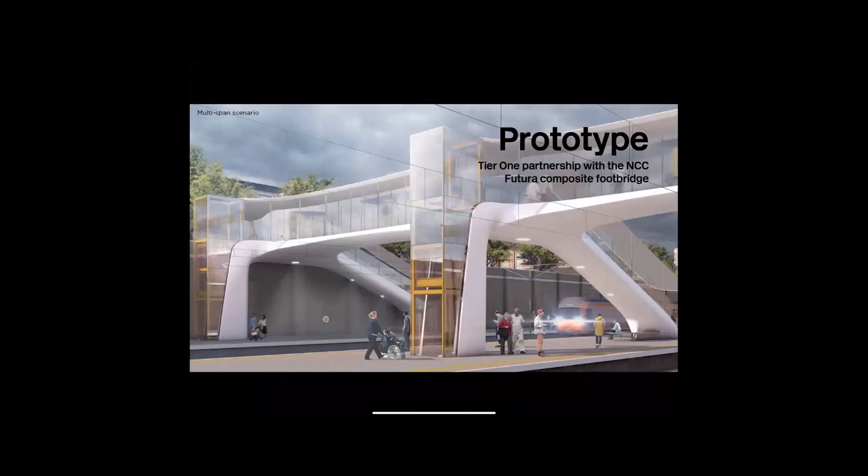This is another design that was part of the footbridge competition, but we are developing a prototype for a sort of innovative composite model footbridge. We're partnering with the National Composites Centre as a Tier 1 member. It's the first rail infrastructure company to do so, and that gives us access to world-leading expertise.

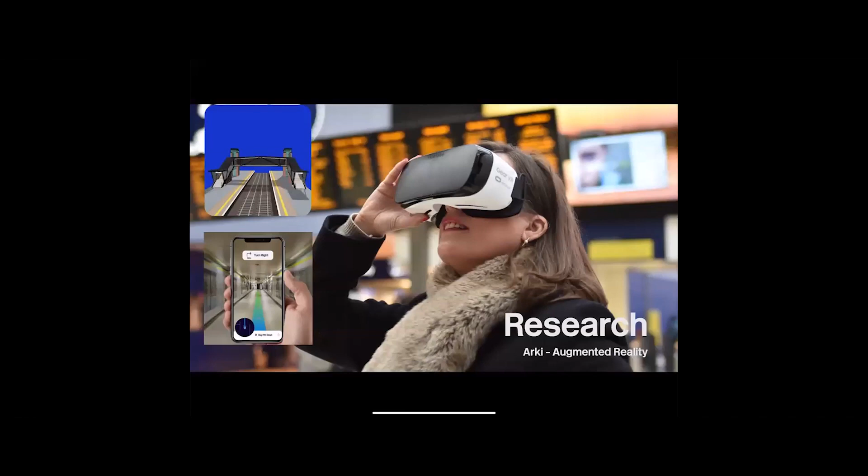Other things going on: if you've been running around the stations recently, you'll see the station bench competition that we're running with the London Festival of Architecture, which is great fun. We're looking at ways the station can react to passengers by automatically anticipating their requirements, providing useful on-hand information. We're also working with external tech companies to use AR software to help the public, planning and project teams pre-visualize footbridges and wayfinding in real time as you move through spaces.

A major advantage of external collaboration is the capacity for innovation through challenge and disruption, as I've mentioned before. So another example of this is our engaging with think tank organizations like Hack Partners, in this instance, to develop a wayfinding flow analysis tool. And this kind of joint brainstorming is about understanding what services we're trying to provide and innovating to solve these problems. You have to accept the disruption, I think, in order to move on in many ways.

And finally, I think I'm near the end here. We're also thinking strategically. I mentioned small stations. In 2018, we commissioned Arup to examine the future role that stations play in our towns and cities, and they published a report called Tomorrow's Living Stations. Last year, we followed that up by launching Think Station, which aimed to directly communicate with the hugely diverse base of stakeholders that stations serve. 11 workshops were held throughout the country that involved 324 stakeholders, train operators and all sorts of stakeholders.

And the aim was to define a brief for the station competition, which the RIBA launched with us earlier this year, and we've just shortlisted the entries, and we'll be announcing those soon.

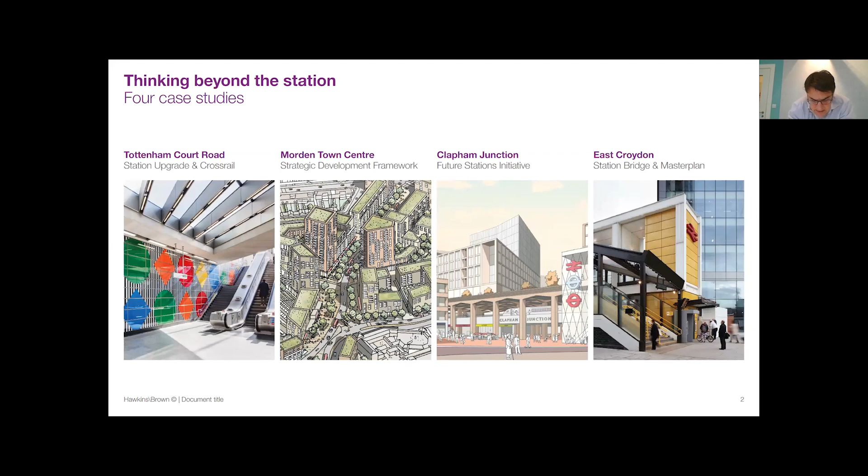The first one is going to be about Tottenham Court Road station, which is really all about developing within sensitive city centre locations, and then Morden town centre, which illustrates some of the planning for growth around transport nodes that's going on, and then Clapham Junction, which is a future stations initiative we worked on, a self-funded initiative, which is looking at a much more transformational opportunity, perhaps. And then the last one is going to be East Croydon Bridge, which demonstrates how even a small connection can act as a major catalyst for regeneration.

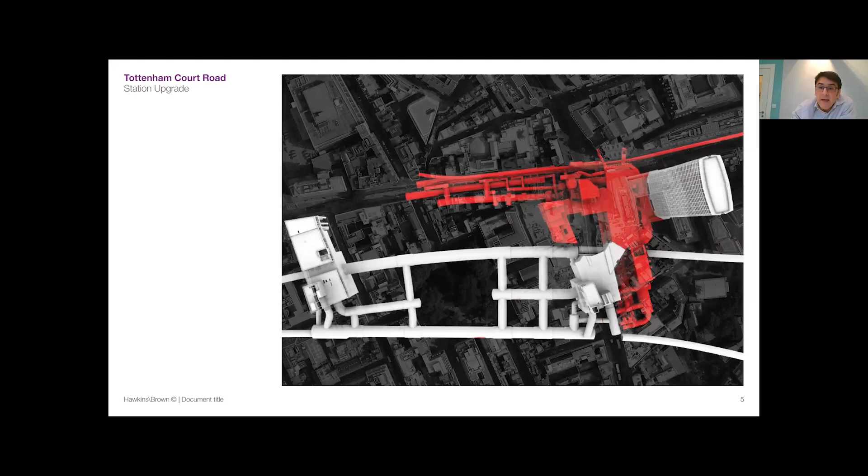For those who remember, the fountain at the bottom of Centre Point occupied quite a large part of the public space, and some of the area extended right up to the edge of the pavement. And that made orientation and wayfinding quite difficult, and created a real barrier for pedestrian crossings and connection into the Soho area and St Giles. It also meant that the station exits were often congested, and there was very little space on the pavements to deal with the people flow and amount of people coming out of the stations.

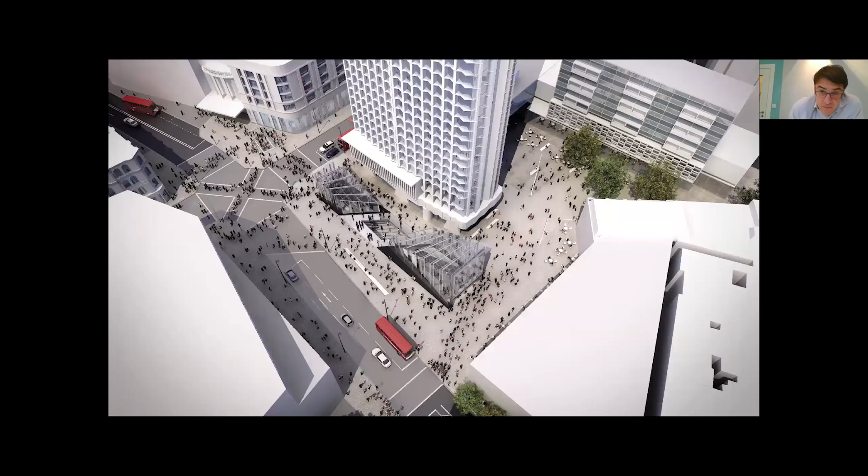And so the upgrades realized the opportunity to improve the public realm around the station significantly, really. And it really helped create a purposeful civic space that's given the station real presence, and has also really helped with orientation and wayfinding.

I suppose key to the success has been to extend the public realm, not just at grade, but also into the station concourse below. And that was done really by creating generous entrances, bringing lots of daylight down into the concourse, but also the use of public art to bring a different sort of quality and joy to these spaces.

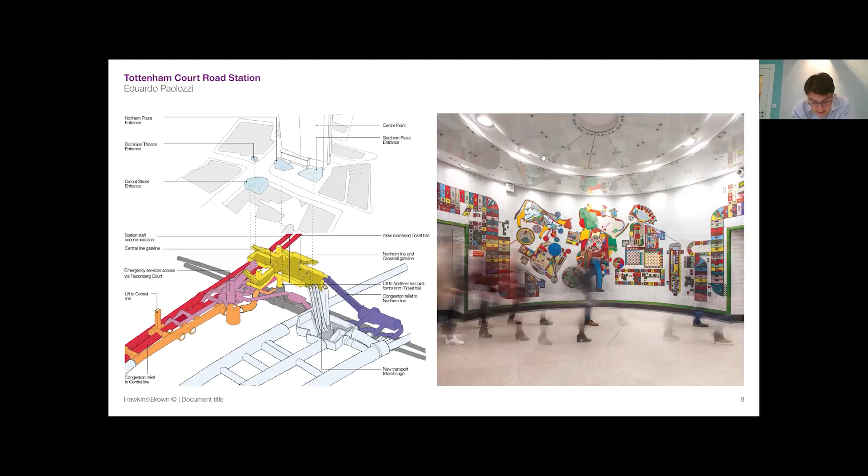And so there's of course already a really great precedent of that happening at Tottenham Court Road in the Paolozzi mosaics, which reflect some of the vibrant life of Soho and Oxford Street, and those are of course still in place and have been refurbished as part of the work. And so Art on the Underground commissioned a number of artists to carry on that great tradition here, and in this case, at Tottenham Court Road and the upgrade, it was Daniel Buren's work that was installed at concourse level.

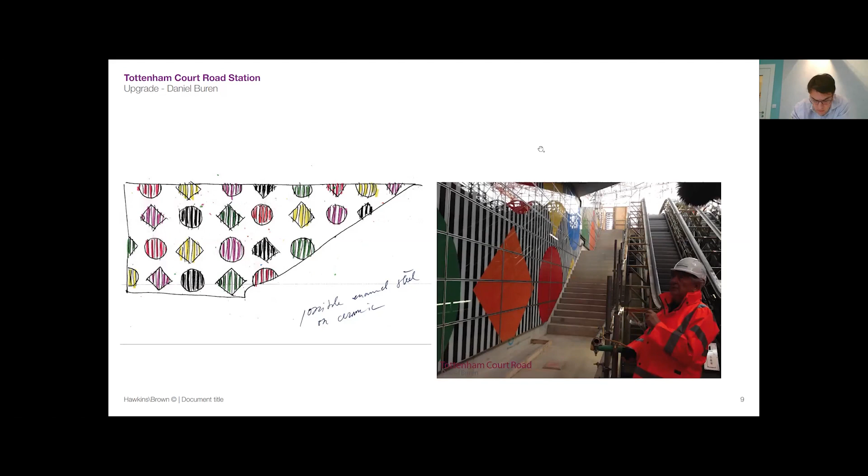And his artwork really connects the ground floor with the lower concourse level and defines the character of the below ground spaces. And that really helps with orientation and wayfinding, and this idea of extending the public realm right down into the station. And here you can see that in situ, and how the artwork is seen at grade and leads the public down into the concourse level.

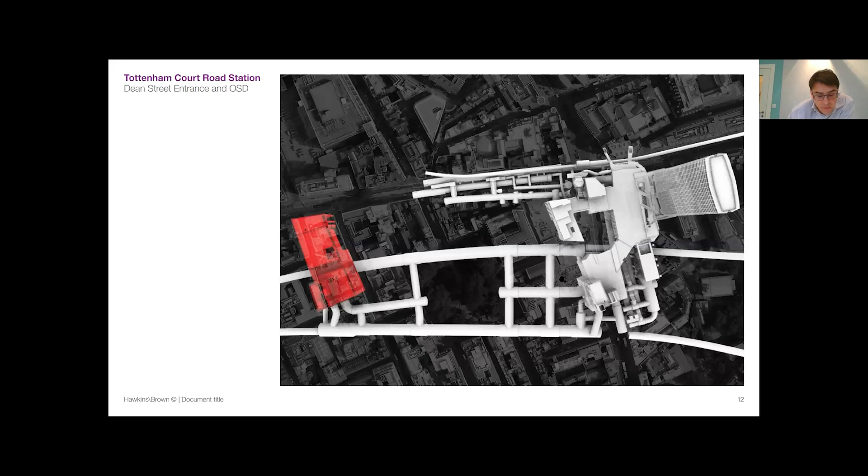And then moving on to the western end, so the western end of the Crossrail station is a more integrated and compact solution, illustrated here in red. And it was integrated into two new buildings, Block C, which is addressing Oxford Street, and Block D, located within the Soho conservation area just behind it.

And this side was really all about integrating the station needs within a compact building mass. And that had to equally respond to Oxford Street and the conservation area context behind it. And one of the key moves you can see here on the right-hand side was to coordinate how station entrance and retail really worked.

So one of the early decisions that had been made was to move the station entrance away from Oxford Street and allow that to spill out onto the pedestrianised area of Dean Street, and so avoiding the congestion of the pavement on Oxford Street, and that also allowed the retail frontages to be maintained along Oxford Street.

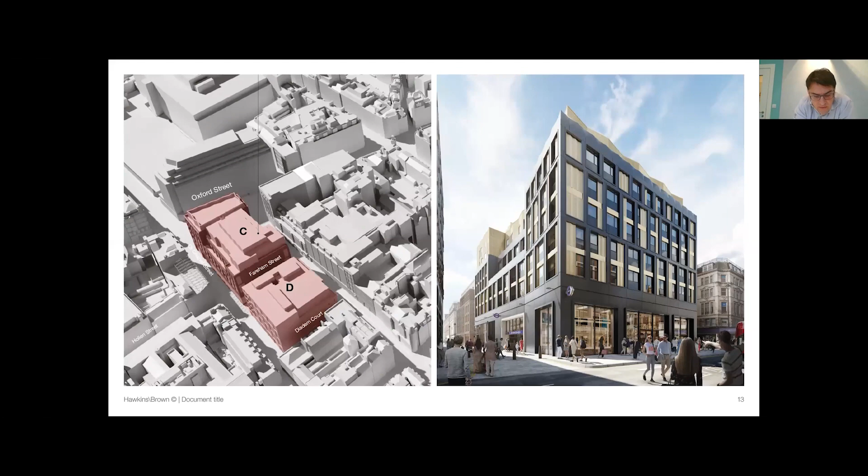And this next view is from Dean Street, looking towards Oxford Street, and that illustrates the different architectural approaches that we had to develop with Westminster to respond to the different Soho context immediately behind Oxford Street. And one of the key moves here was to extend the active frontages along Dean Street.

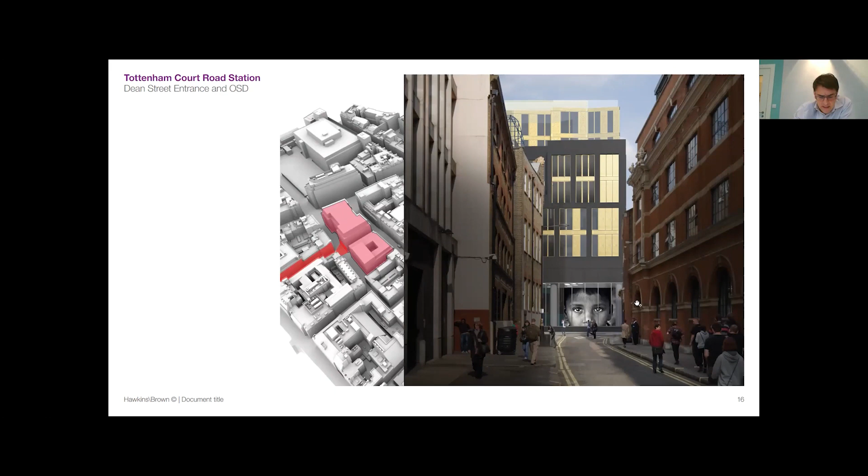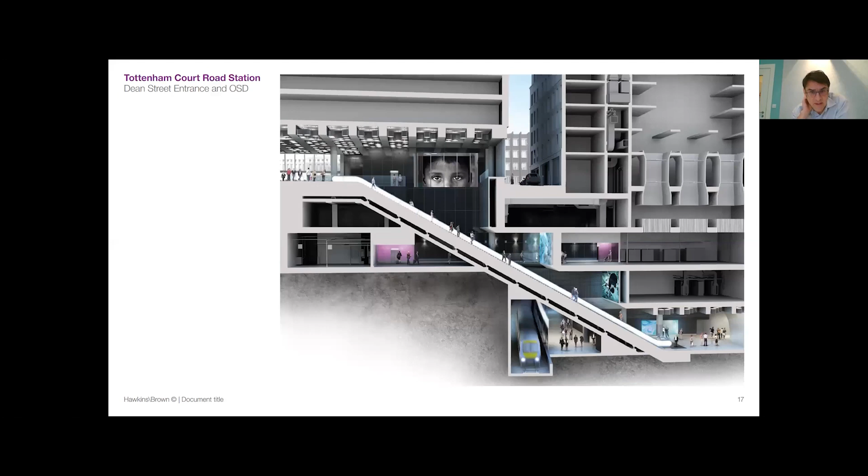And then this axonometric here shows how that artwork also plays very much part of the arrival and entrance sequence as you come into the station or as you're exiting the station. And then the final slide for Tottenham Court Road is this axonometric view that illustrates the complexity of the building. So you can see the tunnel and the station below ground, and how the over-site development needs to integrate with the station entrance on Block C and the ventilation shaft in Block D over here.

And this level of complexity is in part a result of building in a sensitive and particularly dense urban context. So that really means that the building has to be quite compact and integrate things like the ventilation shaft within the building. And so the building then needs to deal with vibration and reverberation for the structure that's coming through the station, as well as the ventilation structure. And that means acoustic isolation in the structure and in the facade detailing.

And then the other aspect I wanted to talk about that is really part of the challenges is reducing the construction time on these sites to reduce the impact on station operations. So these were designed to be prefabricated and all the components craned into place on site to reduce the amount of construction time.

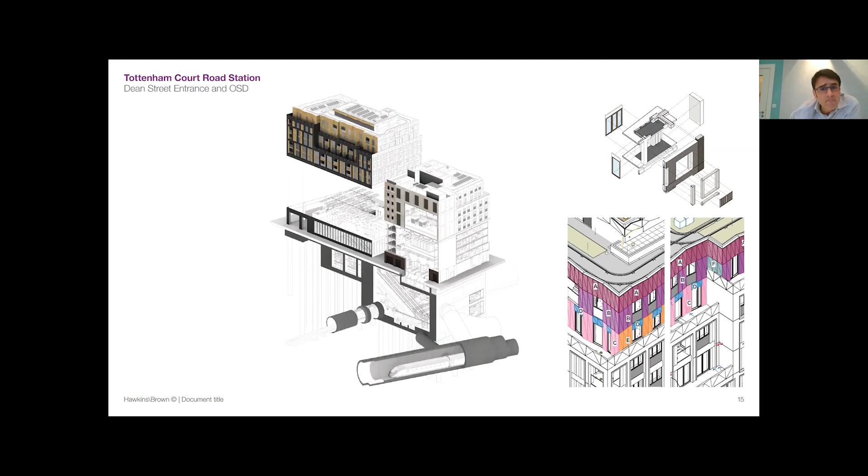So moving on to Morden Town Centre, this is a bit of work that we've undertaken with the TfL commercial development team in Merton, and created a strategic development framework. And this really illustrates a great example of planning for regeneration and growth for a town centre around an important transport node. And this strategic development framework does that by establishing some of the spatial, economic and social principles that any development that comes forward will need to follow to maximize the benefit for the

community. So really what this document does is create a great opportunity to create a more connected town centre with healthy streets and purposeful amenity spaces, as well as new homes. And so one of the key principles is to reduce traffic on the high street and prioritize pedestrian, cyclist and bus movement, but also widening pavements and re-establishing retail and commercial space presence and accessibility. So it's really about revitalizing those spaces and claiming them back for pedestrians in the community.

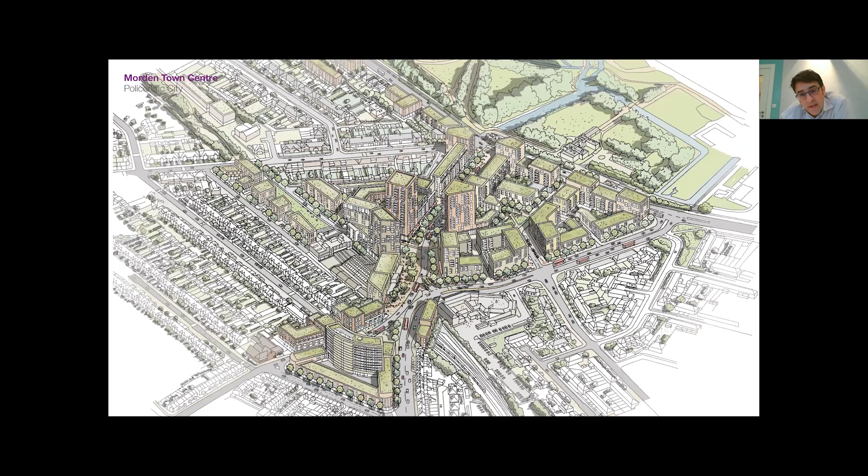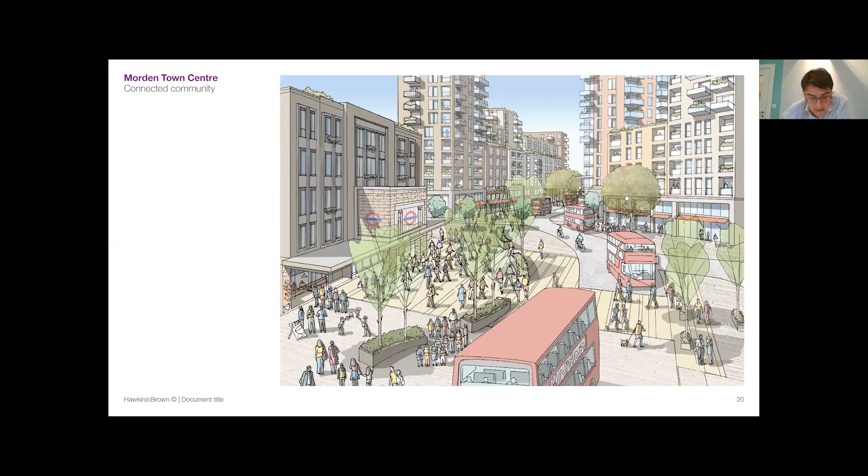I suppose the other thing that the strategic framework does is look quite carefully at how different modes of transport can be brought together so that the interchange time is better, more visible, and helps the onward journey. And then just behind the high street and connecting into the wider neighborhood are other types of amenity spaces, quieter open spaces that can accommodate a variety of uses that can cater for our diverse existing and growing communities, really. So it's an important opportunity of these regeneration projects that really can only come to fruition if they're planned well ahead of time, in ways that the strategic development framework does.

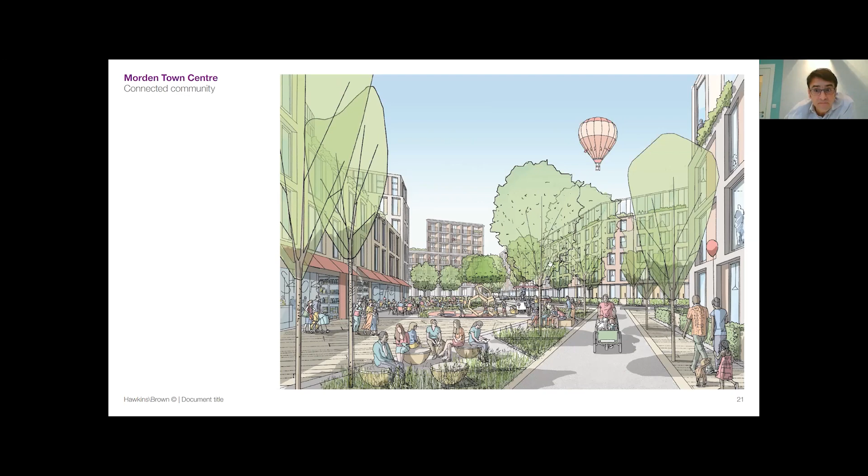And then I'll move on to the Clapham Junction Future Stations Initiative. So this was a self-funded initiative we undertook with Mott MacDonald and Laing O'Rourke, which identified Clapham Junction as a station that was experiencing significant growth, and so it was identified as a station that, if that growth continues, will need to increase in capacity, will need to be upgraded. So for us, that really represented an opportunity to explore how development, transport-oriented development or oversite development can not only contribute towards the infrastructure upgrade, but also offer transformational change to the local environment and connectivity of the public realm around the railway.

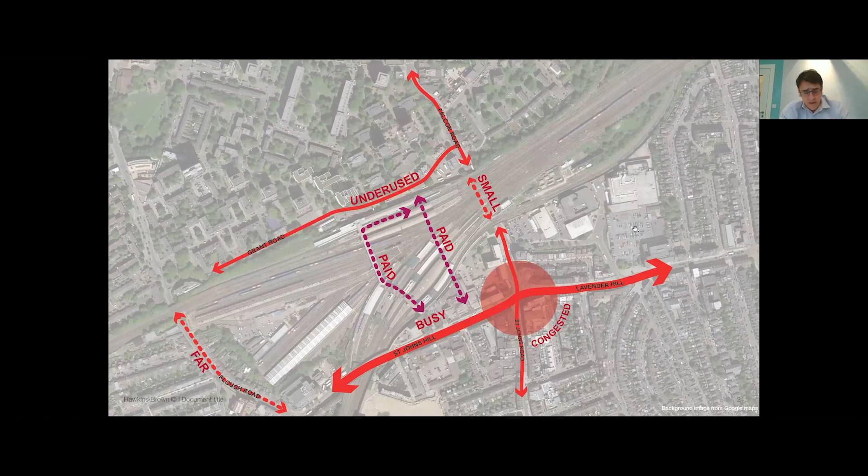And so this diagram illustrates the barrier created by the railway in a bit more detail. Connecting north-south via the high street is really difficult. You either have to go through Falcon Road and under an underpass, which is long and dark, quite narrow, shared by cars and buses and pedestrians and cyclists, and it's really quite unpleasant, I would say, and feels unsafe, particularly at night. And so the only other way to get from north to south is to take the long way around, which is a detour of about a kilometre. And so we now have the means of bringing railway corridors and land into more productive use via oversite development, and this clearly has the potential to do that.

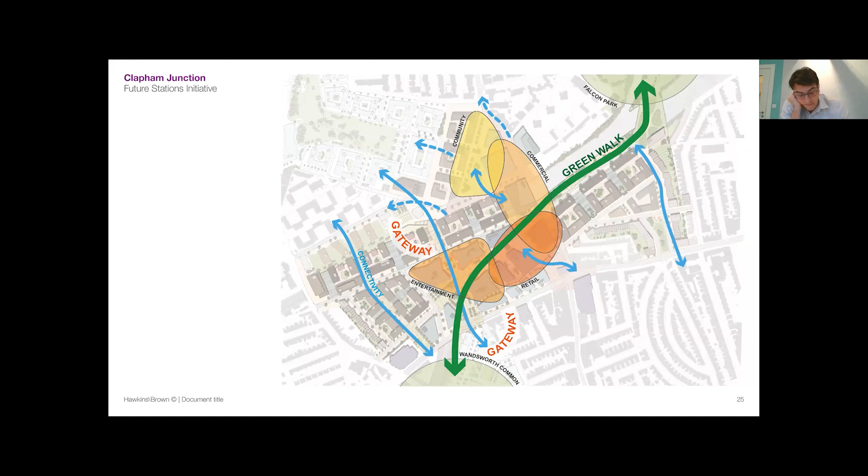And this and the next couple of slides illustrate a vision for that on this site, starting with highlighting in this diagram the potential for additional north-south routes, but also connecting, in this case, east-west, via green corridors that here connect Falcon Park and Wandsworth. So it's about creating connectivity and amenity space, and of course, building over the railway also benefits from containing some of the noise and potential issues with air quality, and providing a much better quality of life and environment for those who live above or next to the railway infrastructure.

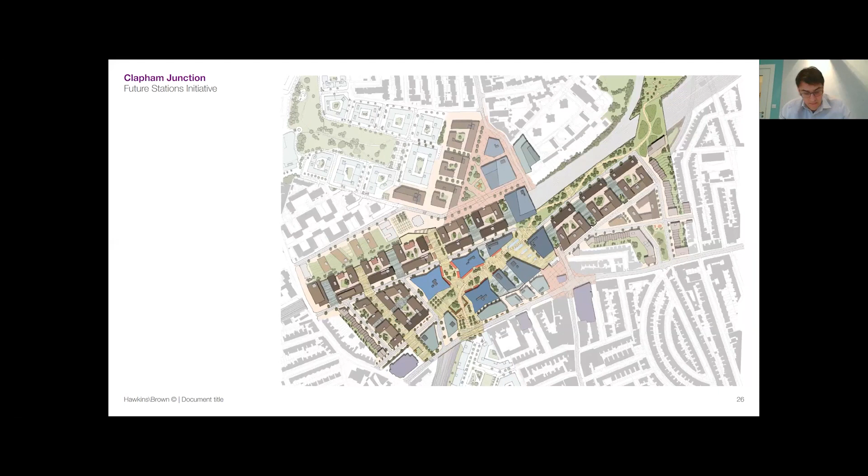Below this level is a sketch showing the realignment of the straightened platforms, which then provide greater capacity to cope with the projected growth, and that addressed the operational and phasing challenges, which Mott MacDonald worked on quite a bit with us, but also it really crucially needed to consider the alignment with the concourse below and the relationship critically with the public realm.

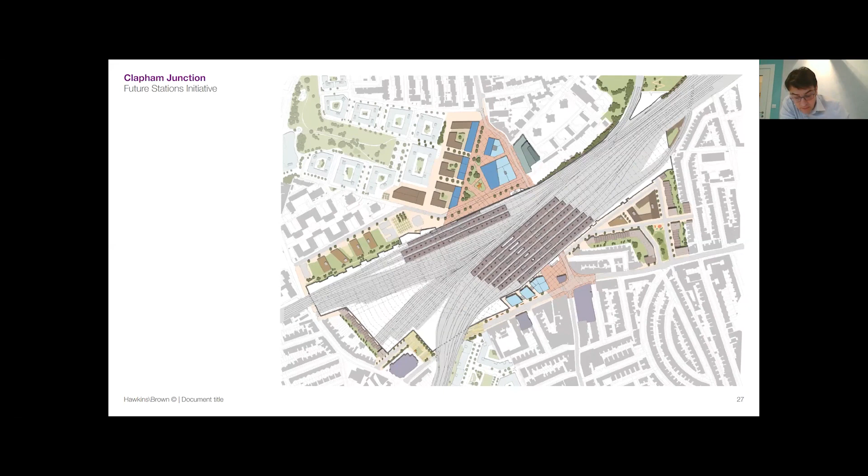And the station concourse in this case is located below the platforms, and what it's enabled us to do is really open that up to Falcon Road, just on the right-hand side there, and extend the public realm into the concourse itself. And that really offered an opportunity to extend the high street into the station and provide an active and safe connection to the other side of the tracks and beyond into the wider network of streets and neighborhood.

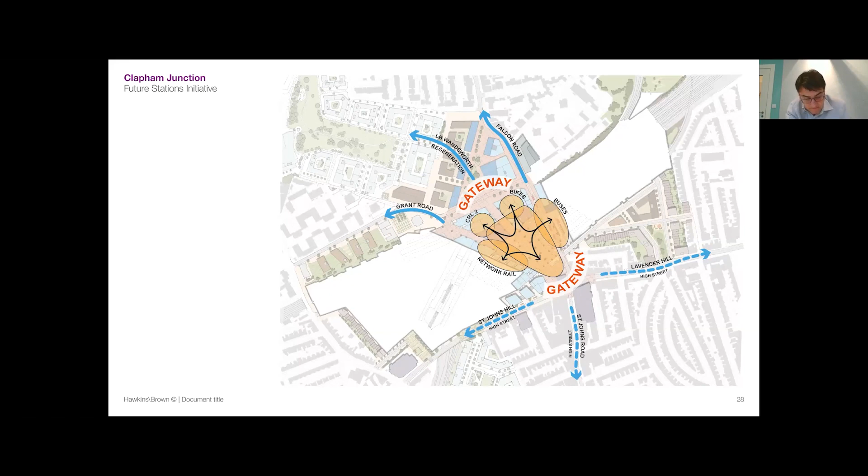And really what this illustrates is that planning ahead for this is really important. For example, a really compact transport hub for Crossrail needs to be planned for if we really want it to be able to arrive in one place and create a really compact interchange hub.

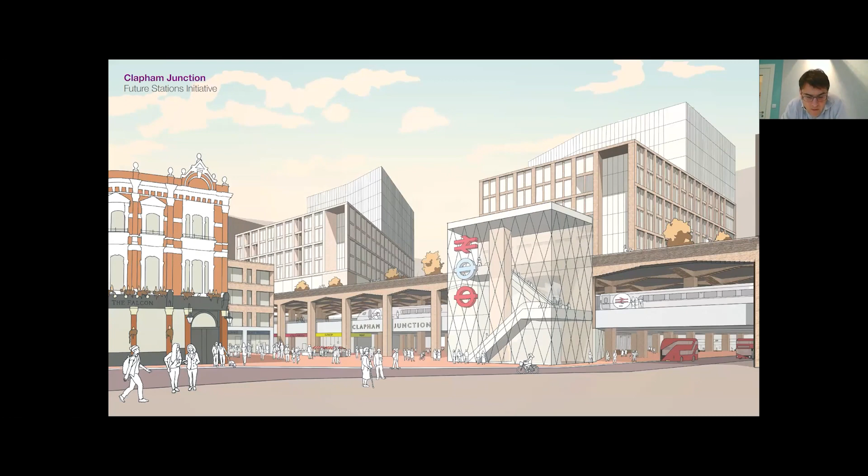And then finally, on this one is an illustration of what a view from St. John's Hill might look like towards the station, and it shows the potential of the new public realm in front of the station and how it could extend into the concourse, connecting to the transport interchange hub and through to the other side of the railway, on the northern side of Clapham Junction.

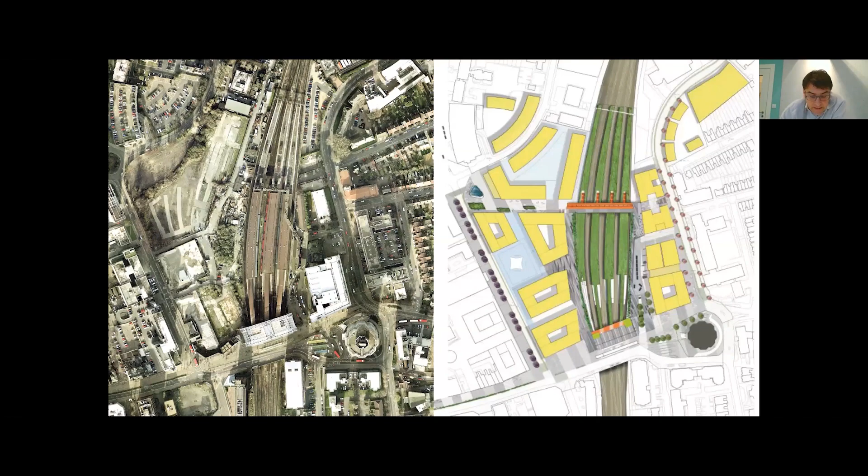Thank you very much, Marko. It's really interesting. And we've had a question from Bob Eden, and I have to say he's put it more poetically than I would have done. But as someone who knows Clapham Junction pretty well, I had the same thought. He says, Marko, part of the joy of rail travel is sitting on an open station, pondering the clouds while waiting for the train to come. How much weight did the station experience carry in the evolution of design? How does the experience pulse as travellers pass through?

And I have to say, having been to places like King's Cross Thameslink, I think it's the most hideous I've been to. But anyway, tell me, have you thought about what it's like in the station and the fact that you are depriving the travellers of light?

Well, it's a really good question, and I think there are opportunities to bring in light through various levels of the station structure, and it does come down to how the development above it is arranged. So London Bridge is a good example of how light can be brought down through the platforms and all the way down onto the concourse. So I think it is about careful coordination and design development of that.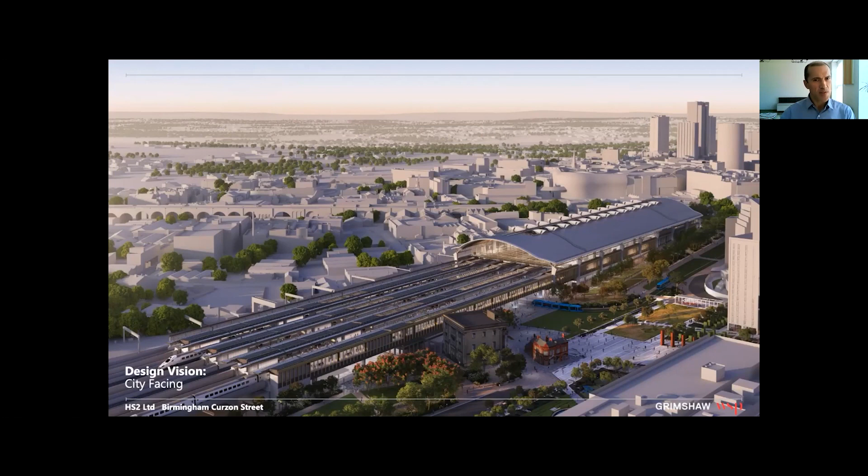So an overview of the new station proposals, just again to give you an idea of scale. Birmingham City Centre on the right of the image. You can probably make out the old Great Western Viaduct serving Moor Street Station coming in here in the middle of the image. What this visual also shows is that there's quite a large level change across the site. So from the city centre end, from the western end, down to this area here where Old Curzon Street Station is located, there's a level change of about 15 metres. So accommodating that level change has been one of the key challenges that we've dealt with in the design.

You can also see the big expansion of landscaping, public realm in the area, and you can probably make out the new tram network. That's the West Midlands Metro, so there will be a new tram stop in an area called New Canal Street as part of a second public space.

So when you build a railway in the UK, you have to obtain an Act of Parliament to give you what are called parliamentary powers, and of course HS2 have done this for the London to Birmingham section. One of the things we've been able to do with the current designs is reduce the footprint, the overall land footprint of the station. So the image at the top is the current design footprint, and the image at the bottom is what's known as the hybrid bill proposal, which was an indicative design prepared to obtain parliamentary consent through the UK Parliament.

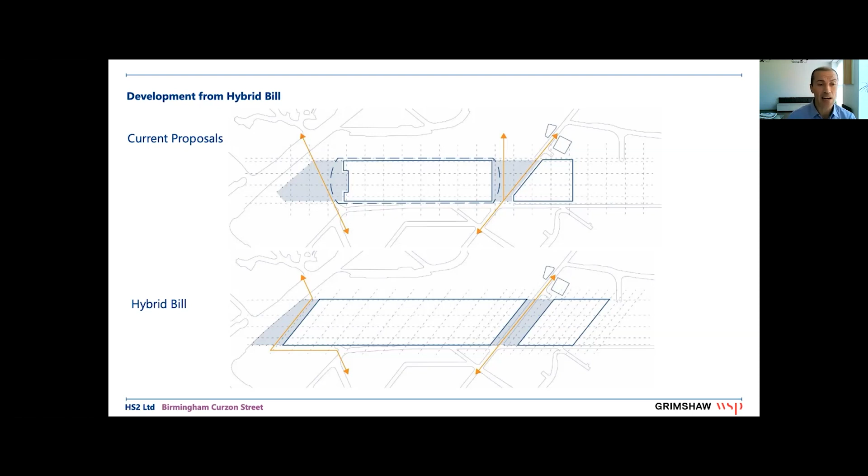So not only have we reduced the footprint, we've also created much more generous public realm spaces. On the left, on the west, Station Square, by pulling the building back, and in the east, a new space that I mentioned earlier, New Canal Street, below the new HS2 railway viaducts, which will also take a new tram stop.

So not only a reduction in footprint, but a reduction from the hybrid bill reference design in terms of massing and scale. This also enables the existing Curzon Street Station building, the heritage building, to have a bit more sky and gives it its own sort of presence in that part of the new development. But again, as I said, by pulling back the building to create a new public space in the west, we've been able to give more space back to the city, back to the public realm.

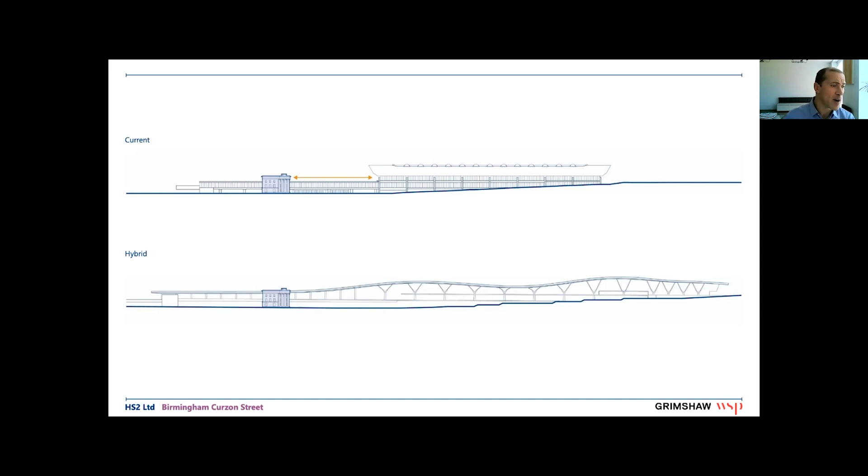So a key driver in the design proposals, as I've explained, was this 15-meter level change. And what we've done is we've grounded the building on what we call an outcrop. The outcrop picks up that level change, but allows activity to the public realm and to the spaces around the station. And it's on that outcrop that the new railway viaducts are coming in.

Birmingham is essentially a hill town, and the viaducts are coming in at +118 above +109, where you've got the New Canal Street public space there. So those viaducts are partially sunk into what's known as the Curzon slope. And as the ground slopes down, the viaducts then emerge and become more visible.

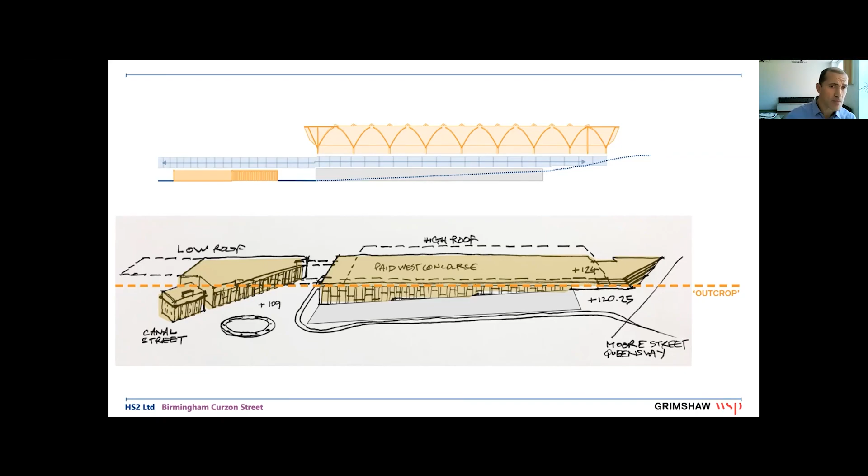So I'll take you now very quickly through some of what we call the design vision aspects of Curzon Street. So these are principles that really guided our design approach in collaboration with both HS2 and the local stakeholders in Birmingham. The first one of our principles is that the engineering is the architecture. So what we mean by that is that the way the building performs and the way it's engineered is the same thing as the architectural language and the architectural expression.

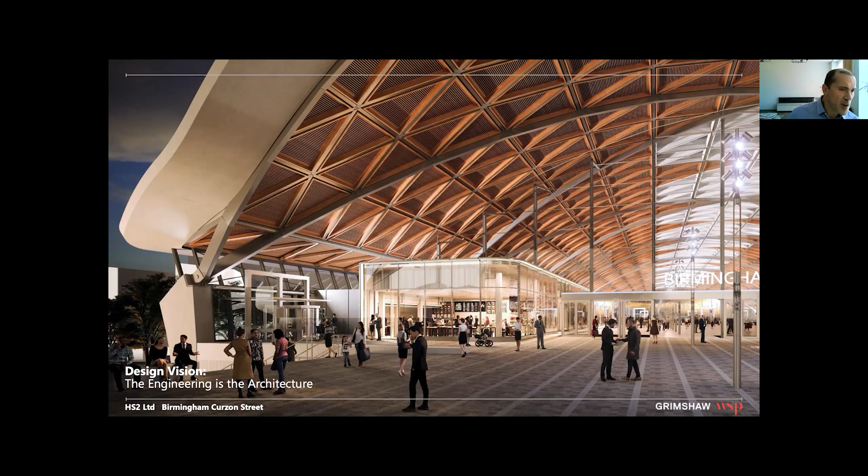So we have attempted to create a design that's very legible, it's very clear, so you can understand how that structure works. This is, as I said, a 70-meter tied arch. You can see how the base of that arch is picked up by the concrete stanchions. You can understand how the pin connection works. You can read each element of the structure very clearly, and hopefully it's a clear and legible expression of both the engineering and the architectural design.

Another aspect is making places in and around the station, so the station doesn't become a point of severance within the city, maximizing the opportunity for public space, increasing the amount of green area, introducing permeable areas for effective drainage, and as I said, placemaking and providing a context for the historic buildings.

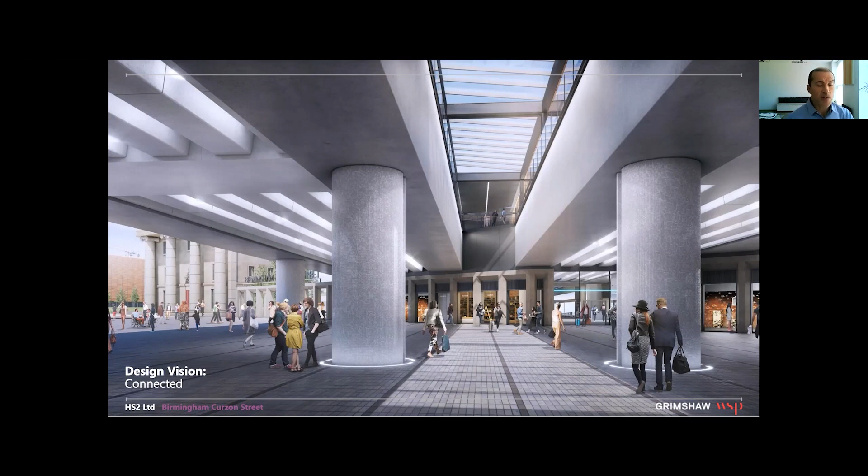This will be wrapped with a new masonry colonnade, and it will form a second entrance at a lower level to the station. There are going to be two entrances at Curzon, one at the western end at Station Square, and this one at the lower level at New Canal Street. From platform level, a generous amount of roof lighting to provide daylight down to the space below.

And this will, we hope, trigger more regeneration, reuse of the existing Network Rail viaducts, which run parallel to the new HS2 alignment, and really bring this part of Birmingham to life and provide connections and accessibility to Digbeth to the south to support that regeneration.

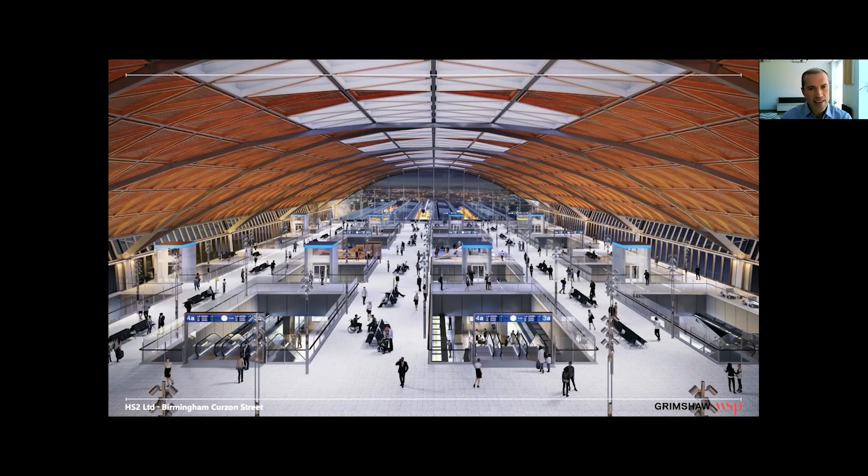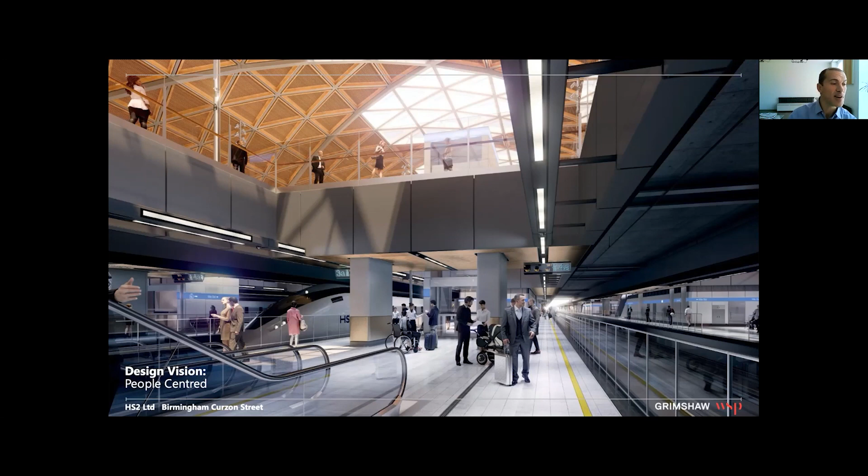There's a view at platform level, with a series of generous voids formed within the concourse level to allow daylight and good intuitive wayfinding, so it's easy to find your way around the station. And finally, the eastern concourse, where the viaducts and the platforms are at the upper level, so access at this location is direct from street level.

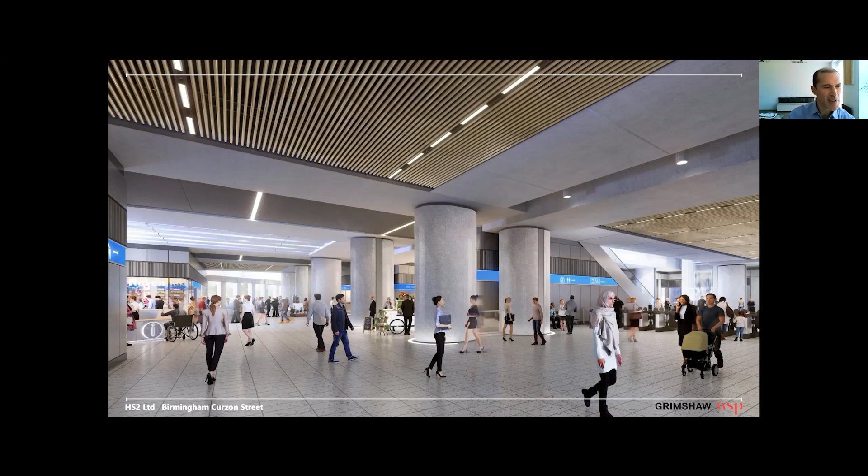I'm now going to attempt to play a video. There may be some slight stuttering in the feed, so let's hope this is going to be relatively smooth.

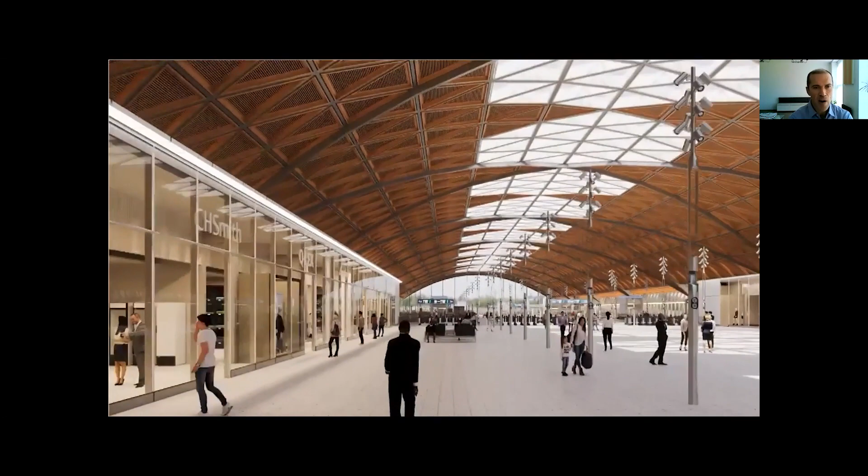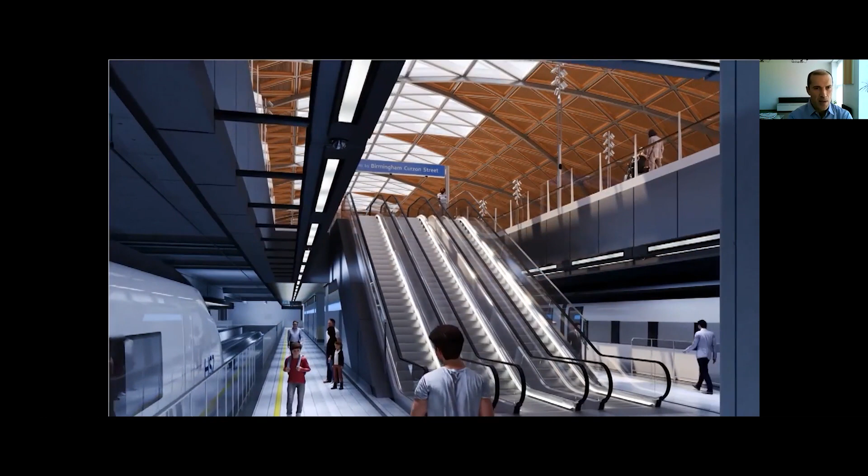Starting the passenger journey from Station Square in the west. You see the lighting totems used both externally and internally. Coming in now to the western concourse, the main retail areas and customer facilities. Heading up towards the gate line and through to escalators and lifts down to platform level. Stepping off your train at platform level, coming up the other direction, up through the voids, out through the gate line and out to the centre of Birmingham.

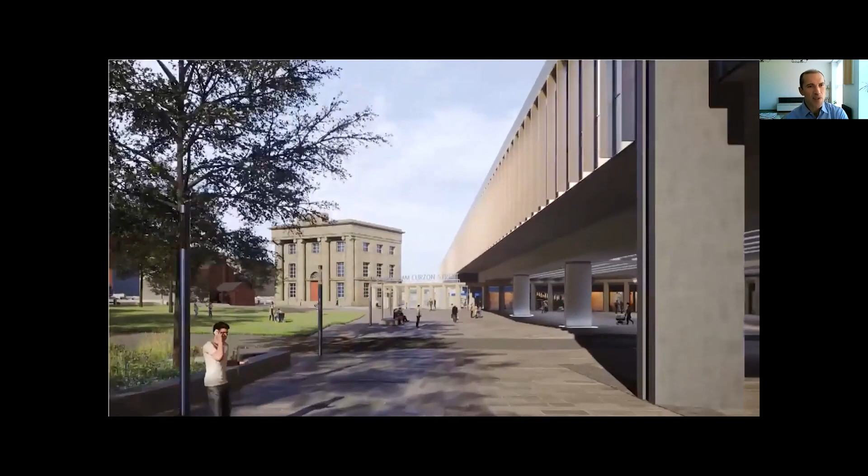Now a journey down Curzon Promenade. You see the tram there. Coming down, you can see the old Curzon Street Station in the middle foreground. Swinging round into the new public space in New Canal Street. Plenty of natural light through the viaducts and then through to the eastern concourse.

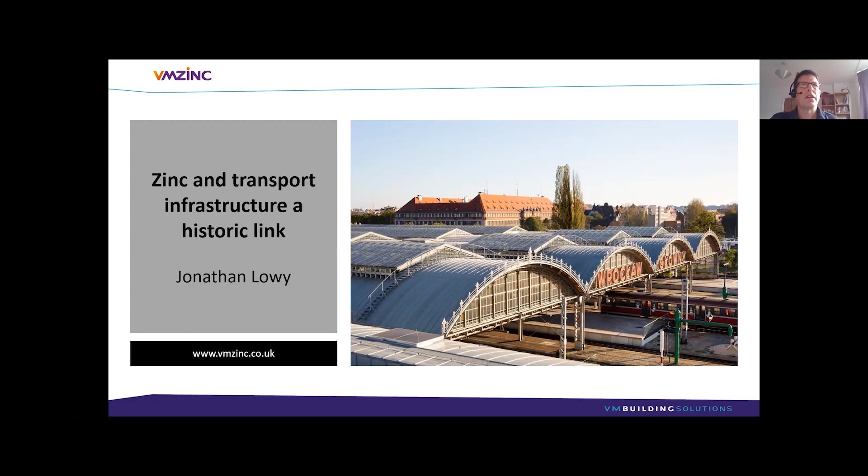Zinc. Just a quick word. What zinc is? It's a metal, and it's been used to clad the outside of buildings for over 200 years. That's an example of Wrocław train station in Poland, where zinc's been used in a fairly traditional way to clad the railway station. But before we go into a bit more detail, I'm just going to explain a little bit more about what we do, which does have a connection to railways and infrastructure.

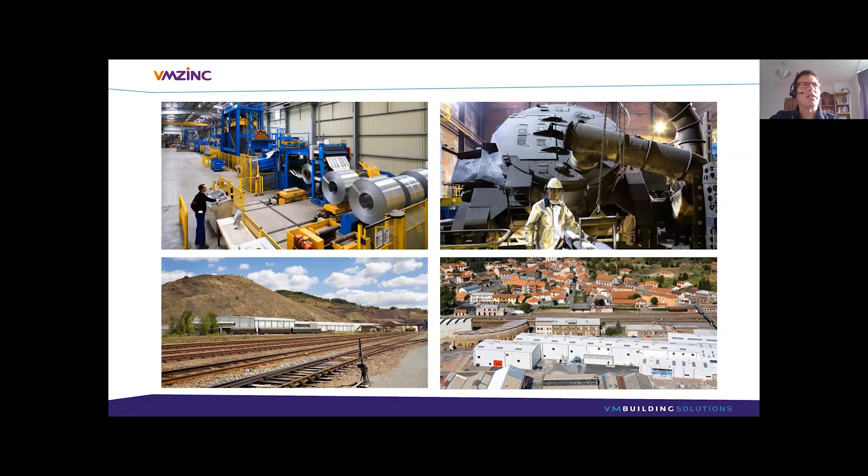And on the bottom right, there's a connection to an earlier speaker as well, because you can just about see about a third of an old engine turntable. Quite a lot of it was demolished a number of decades ago, but there's still some of it that's left. So there was actually a turntable for the engines on the site. So that's where we actually make the zinc, and on the top left you can see coils of zinc that can then be used for various uses, and we'll see a few.

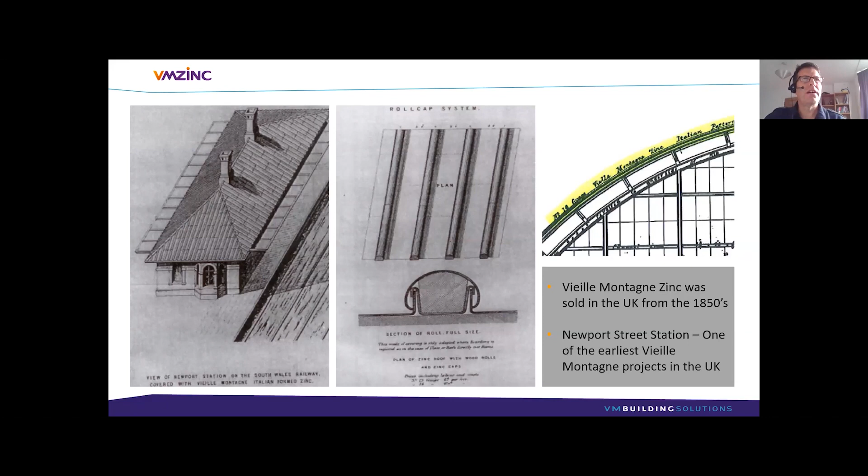So that's in France, but in the middle of the 18th and 19th century, zinc was being used in the UK. On the left, there's some images from the South Wales Railway, Newport Station, and on the right, this is actually the front of King's Cross Station, where you can see Vieille Montagne zinc Italian pattern. VM stands for Vieille Montagne, which is Old Mountain in French. So zinc's got a long history, not only in France and continental Europe, but also in this country.

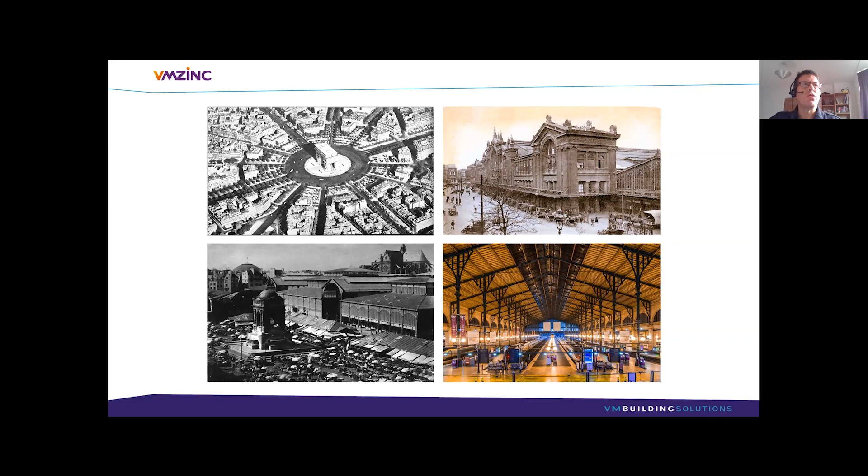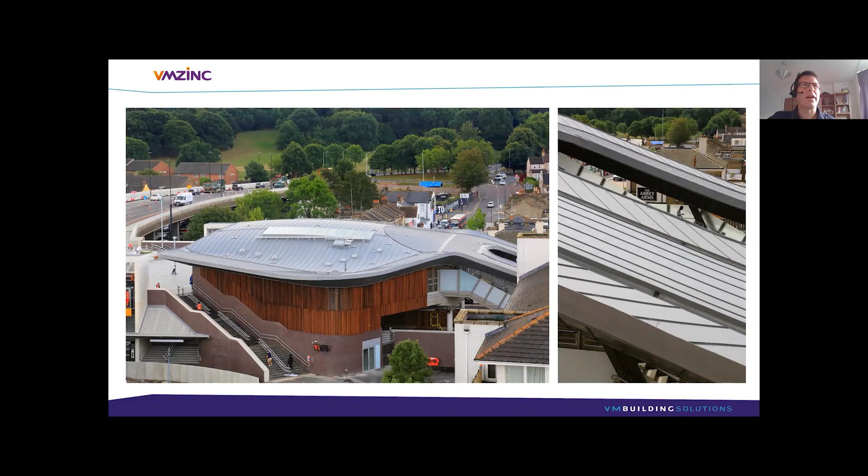And then another geometry, a sort of corkscrew, very different part of the world. This is the mass rapid transit system for Taipei Airport, where it's the same material as on Abbey Wood. It's pre-patinated quartz zinc, but used as a rain screen in a sort of corkscrew design.

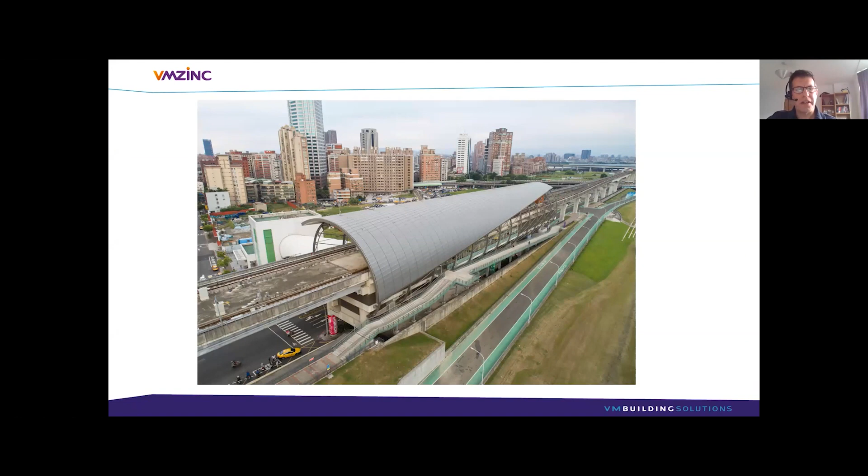We would have to, I think, stop in Switzerland talking about railways, and this is actually a project which has a bit of a connection with, I suppose, Clapham Junction that Marko was talking about. It's an interface between a bus station and a railway station with a fairly elegant zinc canopy using pigmento zinc, which is zinc with a slight color to it, in this case red. With panels on the underside, the soffit in zinc, and then on the top side with the standing seam panels.

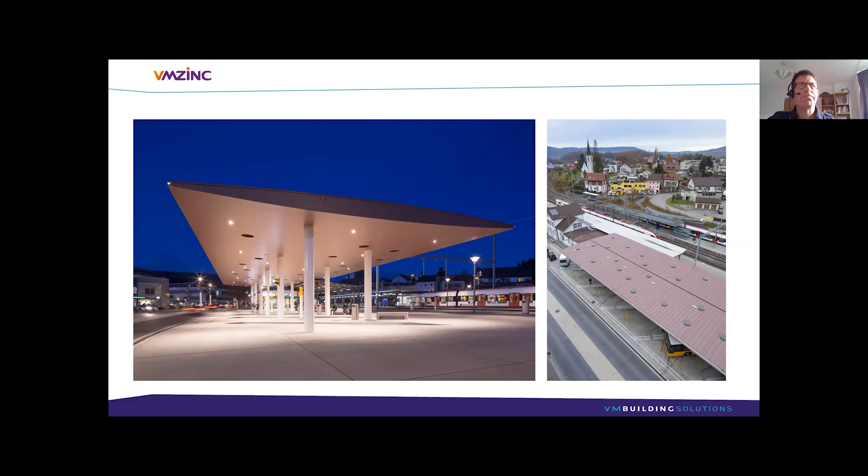So we've looked at railways, but there's also planes, and this is part of the Charles de Gaulle Airport in Paris. This building was designed by Paul Andreu, not the one that collapsed, which was clad in stainless steel. I don't think that was stainless steel's fault, probably more the concrete. But this building was opened at the end of about 1998 and is still obviously active.

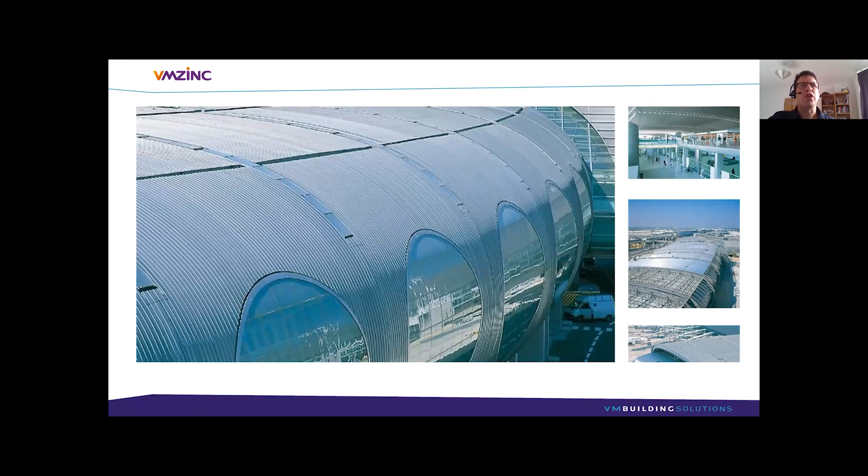This actually uses natural zinc, which is shiny, and there was an initial concern that there'd be problems with the zinc reflecting into the pilots' eyes, but zinc does form a patina fairly quickly. Even if you use natural zinc, it's not quite as uniform as the pre-patinated zinc, but here it's been used very successfully.

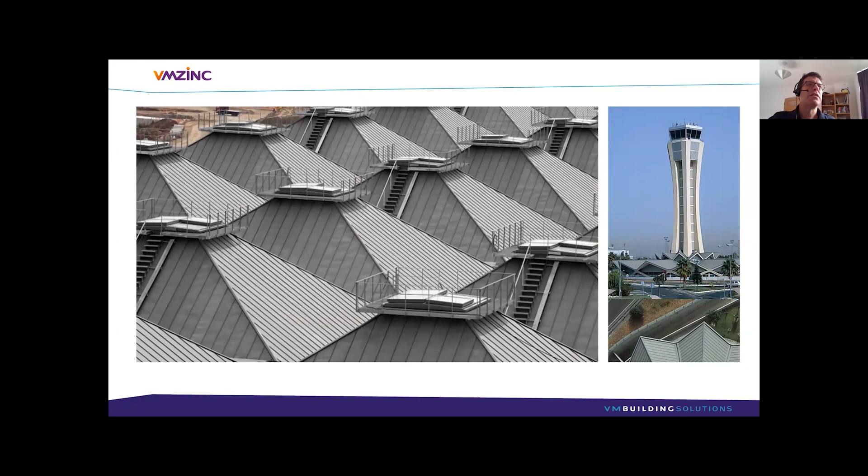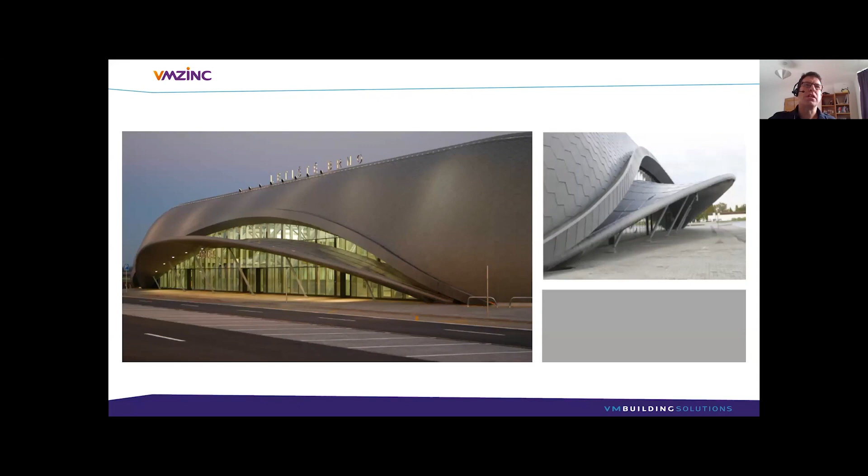And going from some low slope curves to slightly steeper slope angles, this is a project in Malaga in Spain, again an airport, very different type of design. And back to curves, this is Brno Airport in Czechia, where hexagonal zinc shingles in quartz zinc have been used to clad the outside of the building.

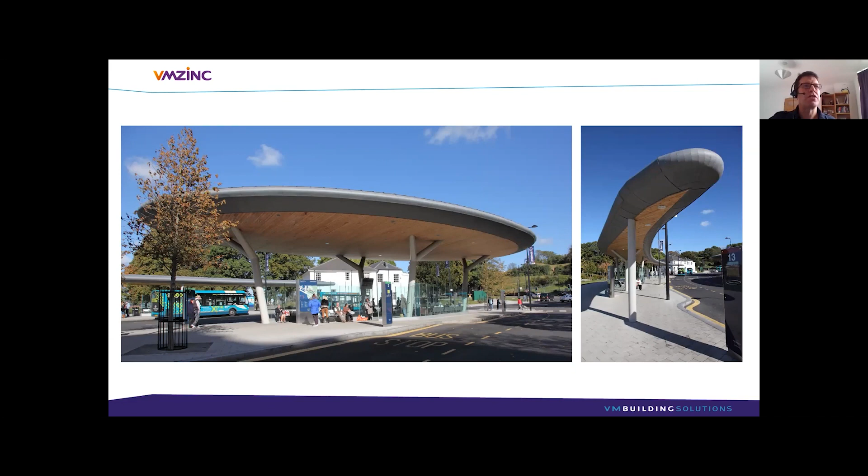So we've looked at some trains and we've looked at some planes and now some automobiles, or more precisely buses. Clapham bus station, which was designed by D5 architects quite a few years ago now. Again, combining zinc with timber, which is quite an effective combination. And the architects here wanted to create a very open environment where the access to the buses could be approached from all directions.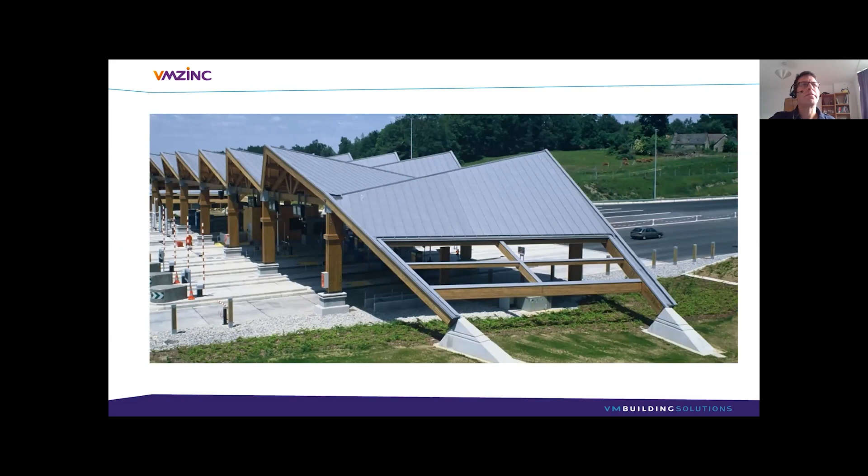And back to angular, this is a toll booth in France, showing again timber and zinc combined. You might guess from that view where that is. That's overlooking Barcelona, the Montjuic area where there's a stadium and a cable car station. And here the outside of the cable car station has been clad in anthrazinc, the dark zinc rain screen panels.

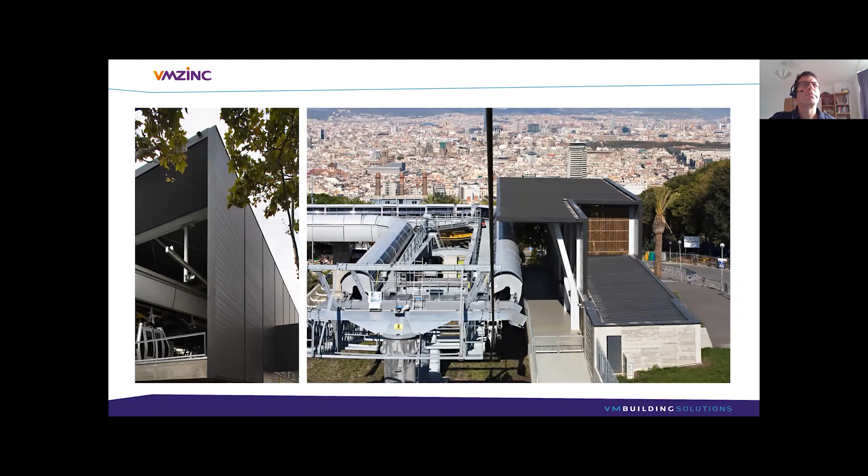So just quickly, I've run through the options that can be used with zinc for transport, but there's many other options. If you do want some more information, if you do want samples, literature, drawings, we'd be more than happy to discuss that with you.

But Ruth, I don't know whether you have any questions for me. I'll be happy to try and answer them. Okay, thank you very much indeed. It's very difficult to travel at the moment, so thank you for taking us on a virtual journey. A couple of questions, and I'm going to ask them to you, both together.

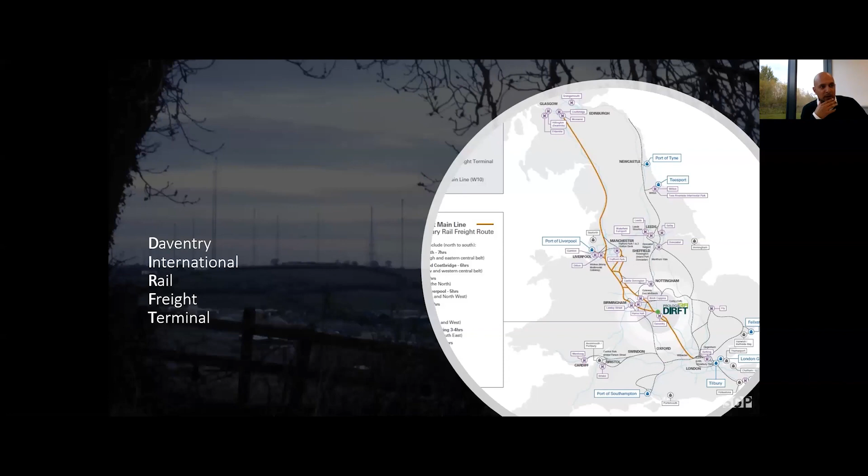It's my pleasure, as you say, to talk about DIRFT, in particular DIRFT 3. DIRFT is recognised as one of the most successful intermodal rail and road-linked logistics parks in the UK. And it's located in the heart of the Midlands on a site which you may all remember where there were many radio masts and some agricultural land, but now it's been developed.

DIRFT consists of effectively 3 parts: DIRFT 1, 2 and 3, surprise, surprise. DIRFT 1, you can see here, is highlighted in blue, and DIRFT 2, which we've been involved with, is in purple on the left-hand side.

That has been completed in 2015 and took approximately nine years. Just to give it a little bit of scale, the Sainsbury's building in DIRFT 2 at the northern end, as you see it, I hope you can see me pointing maybe. The Sainsbury's building is about 1 million square foot of warehouse, and it's over 20 meters high, just to give it a bit of scale to what you're looking at at the moment.

The reason why it's so successful is the fact that it's almost on the crosshairs of the A5, the M1, and the West Coast Main Line. And inherently that lends itself to the link of rail and logistics, which is key to the park. Today I'm hoping to focus the talk on DIRFT 3, which is currently being developed, and that's the yellow area to the north. And we started that back in 2008.

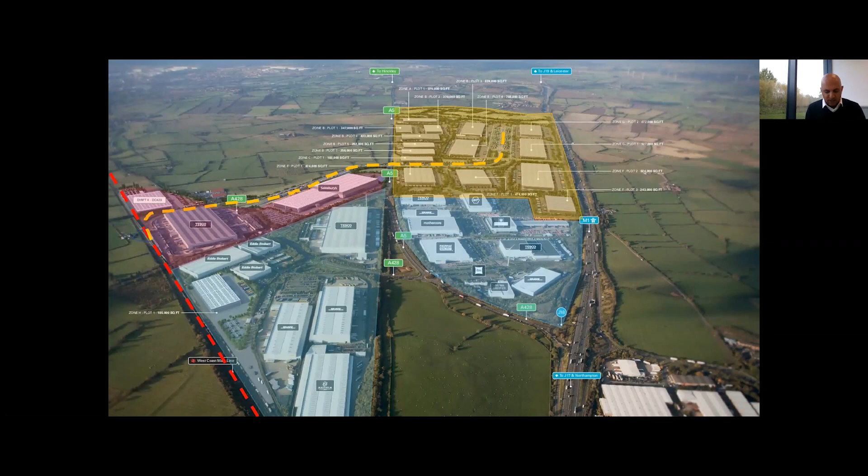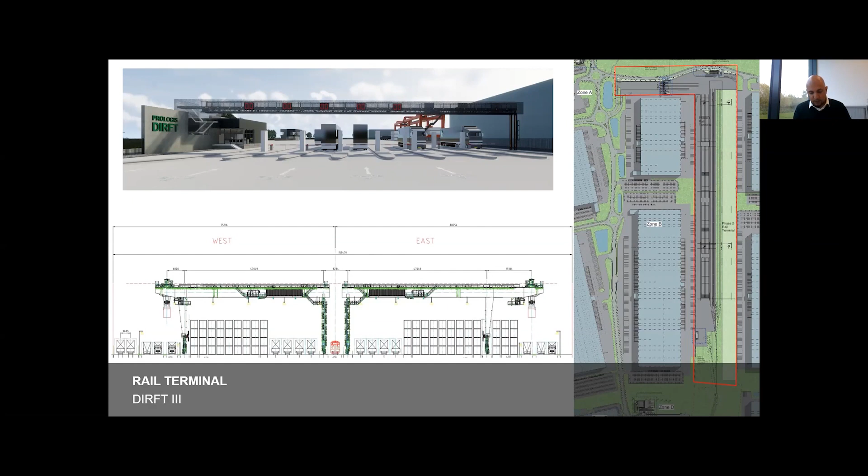Next slide. So within the park, there are other aspects other than the rail and the main logistics warehousing: ancillary accommodations and facilities. To the north of the development is Lilbourne Meadows, which is 70 hectares of enhanced landscaping and ecology. There are trim trails and green corridors linking through the master plan, linking the park and its surroundings. And these are enhanced further with recreational facilities, such as sports pitches. There are EV charging points across the park. There's a large HGV lorry park, and training facilities and an education building aimed at the residents and occupiers of the park.

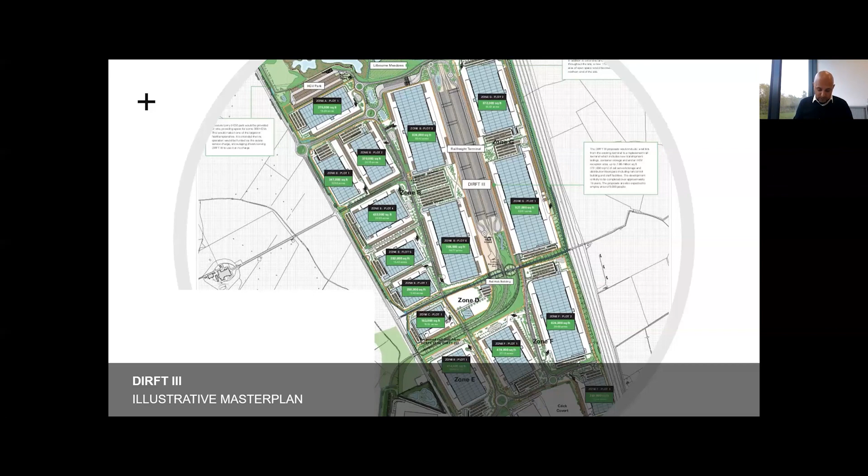So this is a little bit more of a 3D. Overall the development is 9 million square foot of development, and it's anticipated that there's about 9,000 people expected to be employed across the development as well.

In terms of the link between rail and logistics, the freight transported by rail, it's estimated that it cuts the carbon emissions by 76% in comparison to road haulage. So it gives you a bit of an understanding of the sustainable side of things.

In terms of the warehouses themselves, we've developed with Prologis, who are the private developers of the park, their standard design parameters for their warehousing and their typical warehouse design. And the key drivers that set out the parameters are market demands and institutional standards, construction techniques, supply chain, and these are forever evolving.

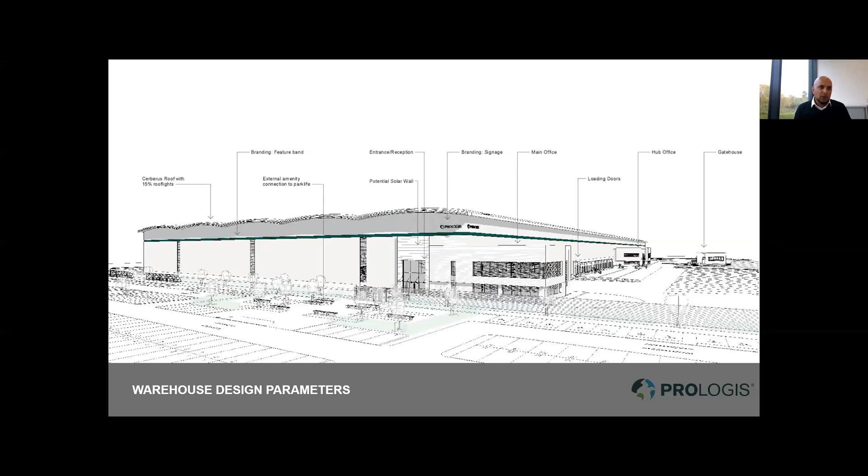Here you can see the various overarching elements that you have with these larger units. You have the gatehouse, a hub, and the like. And there's specific branding and an inherent architectural approach that we try to enhance and adhere to in order to have a harmonious park, as it were. So it's quite critical to ensure that the architectural approach is a holistic one.

The overall proportions of the warehouse tend to be between a ratio of 1 to 2 and a maximum of 1 to 3. The portal frames are based around optimization of standard portal frame design, which accommodates standard racking layouts, mezzanine adaptability, and your standard docks and level access door sizes.

The yards themselves tend to be between 40 to 55 meters, enabling them to accommodate the main apron itself, HGV parking and general maneuverability. The administrative side tends to have the main office, an entrance in one of the corners that you can see is closest to the car park, and some outboard hub offices set within the apron that tend to manage the operation of the apron and the yard, whereas the main office mainly deals with the administrative side.

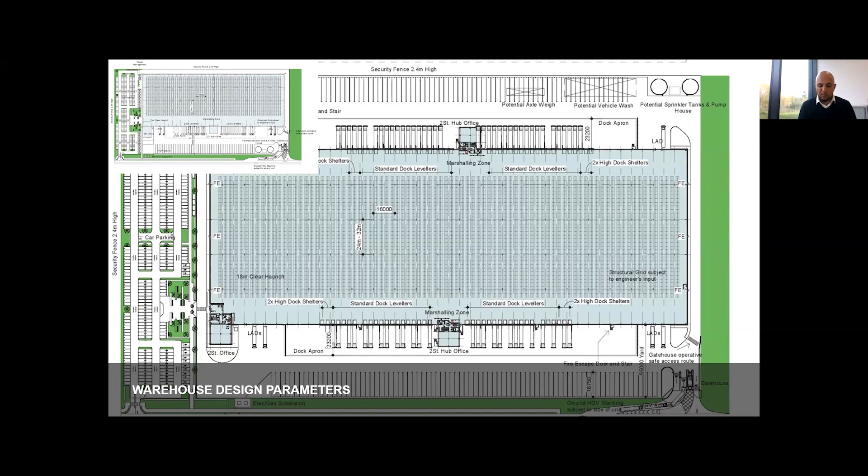So when I say scalable, you can almost type in the target warehouse requirement of a customer, and automatically, from the knowledge gained through the market demands, we can dictate the typical dock requirements, level access doors, and the like.

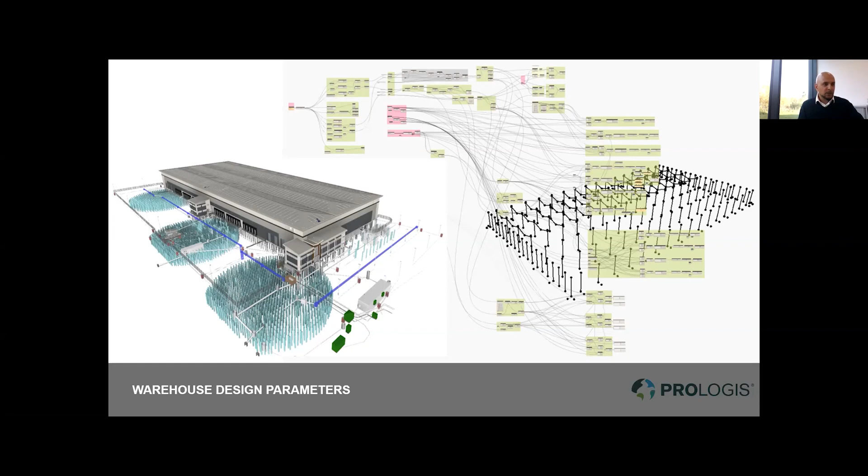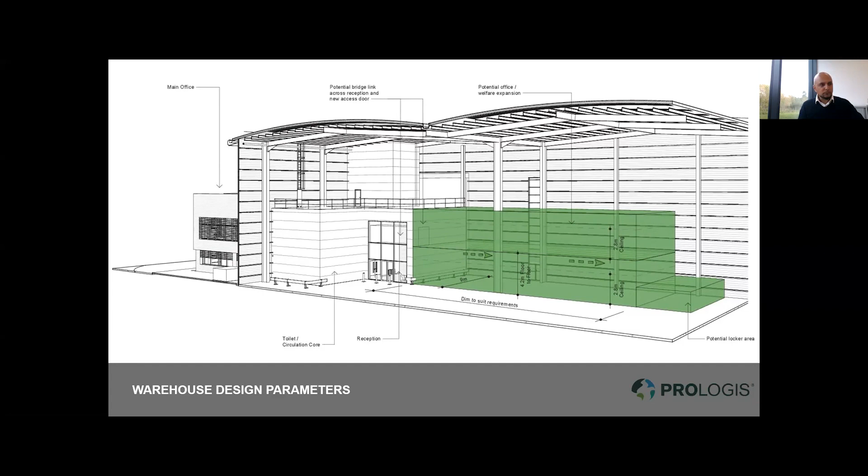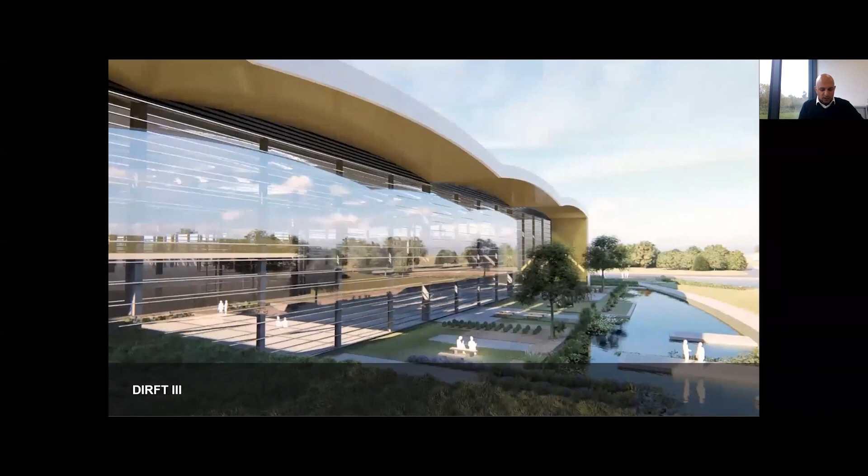In essence, enhanced architectural design is becoming more and more of an attraction, not only for the developers, but also the tenants themselves. They're coming because they can see the benefits to the workforce and fundamentally to their business, because it retains that workforce. And it's well embraced. Because in essence, we're fundamentally trying to create better environments for working.